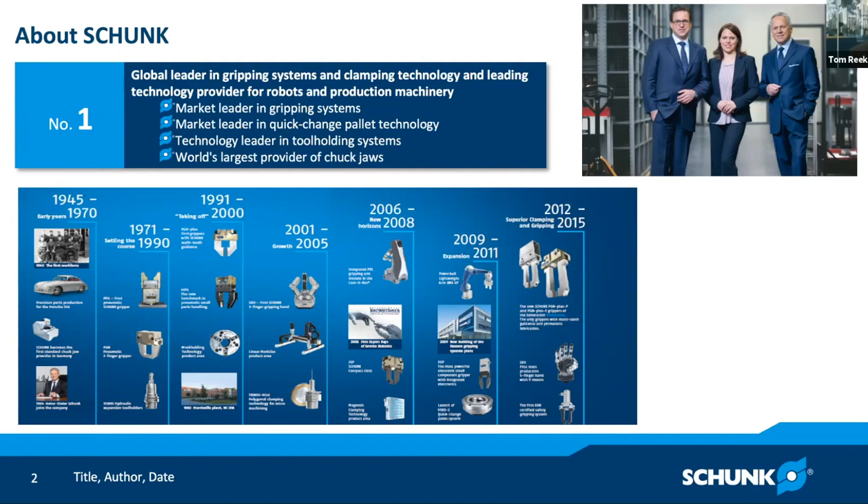So the table here is just showing a little bit about the evolution, but in the next slide, I wanted to speak to you a little bit about gripper evolution and how it relates to our topic today. And because we specialize so much in grippers, I tried to use it as the backdrop of a lot of the conversation, but the principles in terms of electric technology apply across lots of different actuators and equipment used in manufacturing, particularly automated manufacturing.

So when I started my career at Cummins Engine Company in 1994, that looks like something that we would have done. Or you remember when you had to actually construct the robot using a syringe to activate it. I don't know if you had to do that at all, but it looks exactly like that.

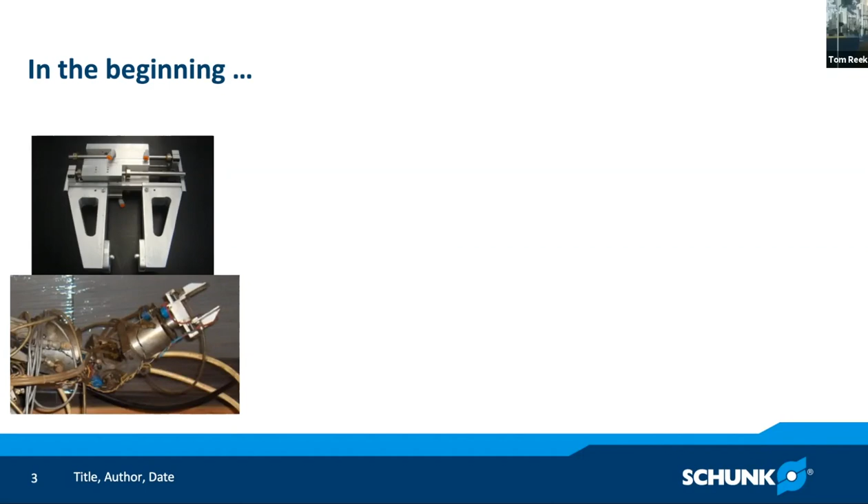Exactly. So here it's just showing in the beginning in the 80s, I always admire those first engineers that first adopted robot applications, and the fact that they were so successful despite the many challenges they had. Just in making any end of arm tool from the gripper, much less complicated end of arm toolings, they had to design the whole thing from scratch. They had to select and maybe design air cylinders, bearings, gears, and all these parts, put them together, hope it would work, and then run the application and go on to their next project.

And so what happened is, starting in the early 80s, a lot of companies started coming along like Schunk, making standardized actuators. What you're showing here is a cutaway of a modern pneumatic gripper today. It's this concise, very optimized component that applies gripping force and stability to hold the workpiece. It's easy to mount, easy to put sensors on, and does a good job of handling a wide range of parts just out of the box with only designing some small custom tooling to accessorize it.

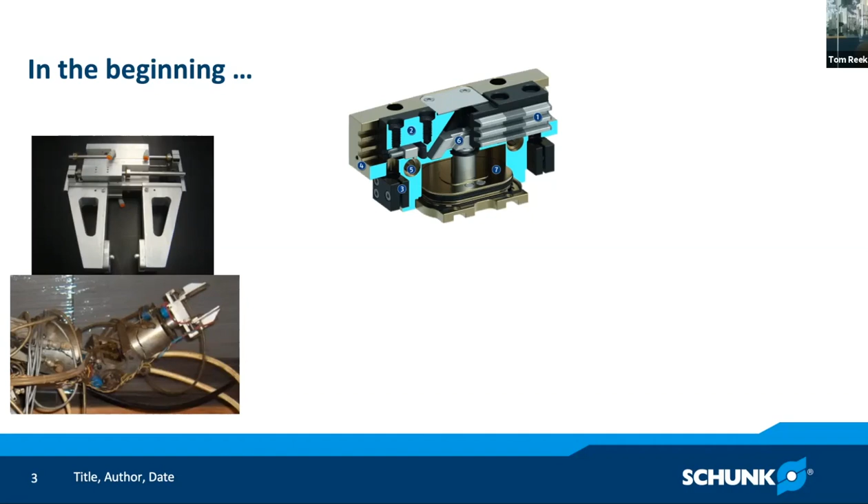So the standard grippers are mounted out of the box, custom fingers would be designed, and in the picture toward the right, you can see that even with what looks like really small grippers, they can handle really good payloads because these grippers were designed and tested, and all the unknowns are taken away, and the customer can have assurances that it's going to work for their application.

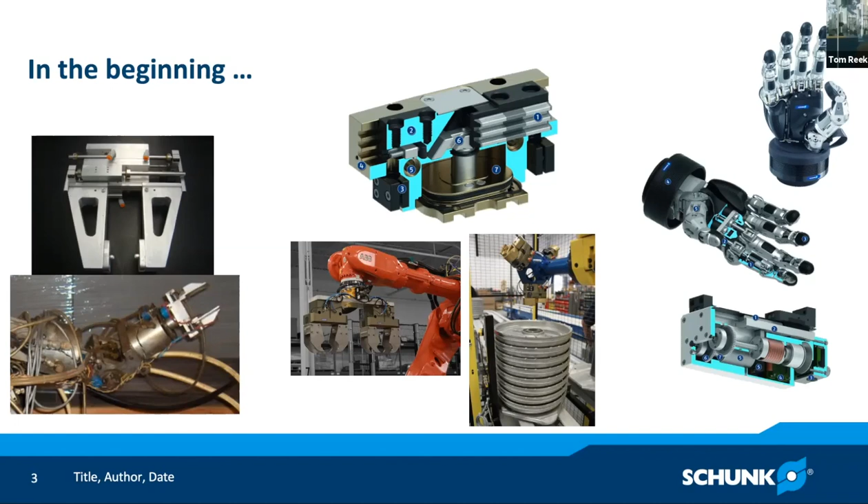So the later trend, or the trend that's continuing with this, is that in addition to the strong mechanics that are already available in the modern pneumatic gripper, we're also seeing these advanced mechanics that are taking place, like this hand, for example, that gives us all this flexibility. So now we're able to open up to a wider range of applications. We have the technology to be able to control these complex mechanics as well.

And then, in addition, the picture that's on the bottom of the screen there, that's just showing a simple one-axis gripper. But in both of these cases, what's happening today is we're seeing this combination of mechanical innovation combining with sensor technology, vision technology, software, so that these components are becoming more and more advanced, and engineers are not having to reinvent the wheel every time.

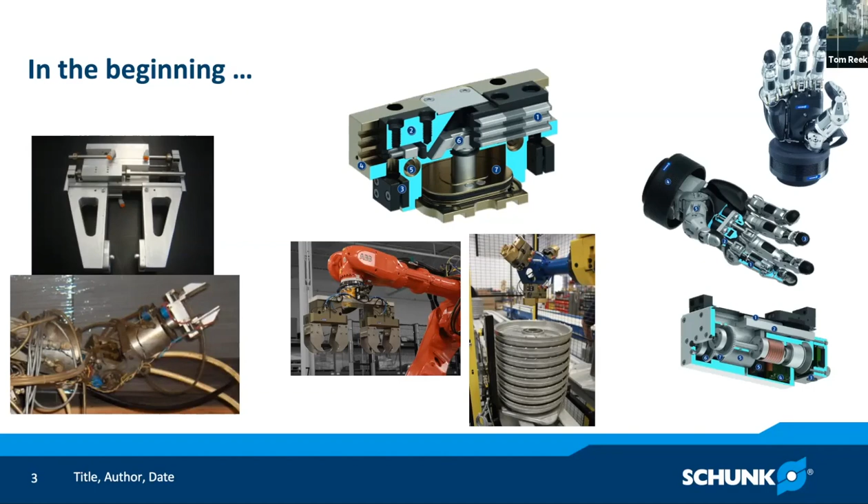They can get their application finished sooner because the components are becoming more and more application ready, not just from a mechanical standpoint, but also from a controls and design engineering standpoint. And that's a big part of where electric driven technology also is fitting in. Many of the engineers that you work with are involved in assembly automation type tasks.

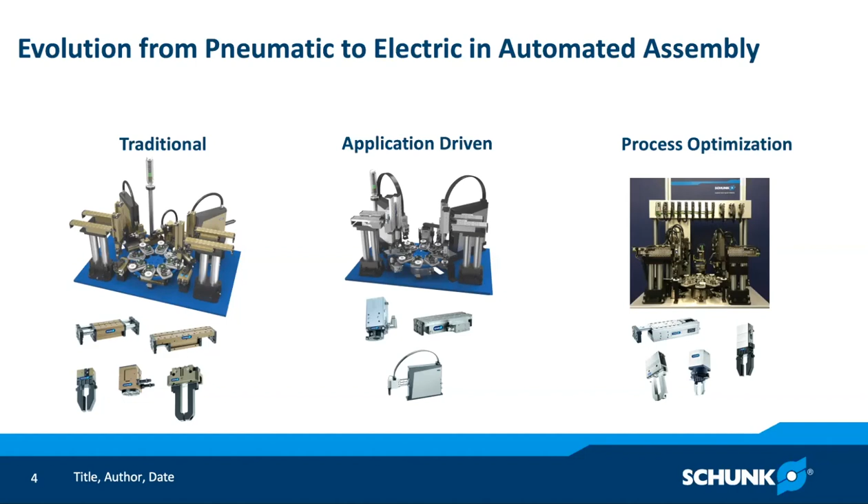Some of the components can just do the things that pneumatic components would also do as easily, but by sheer virtue that they are electric, the user of the machine can benefit in other ways. So what are those? What are some of the applications that would be unique to electric versus pneumatic?

So if we go back to gripping, for example, one thing that's really common is that you have workpieces of varying sizes, or say you're doing an assembly, you put a gear onto a shaft, and the assembly together is a different geometry than the part by itself. So you might have interferences that require position control, or things that change within the process that might require force control.

So for example, say you're picking up a glass vial and putting it into a tray, and then you have to pick up the whole tray. When you pick up the glass vial, maybe you need very low force because you don't want to crush it or mar it in any way. But when you pick up the box that contains it and other parts, you need a higher gripping force.

So that dynamic control is one of the reasons that drives people from pneumatic to electric, being able to change it on the fly with a certain amount of precision that you can't do with pneumatics. Got it. Yeah, that makes a lot of sense.

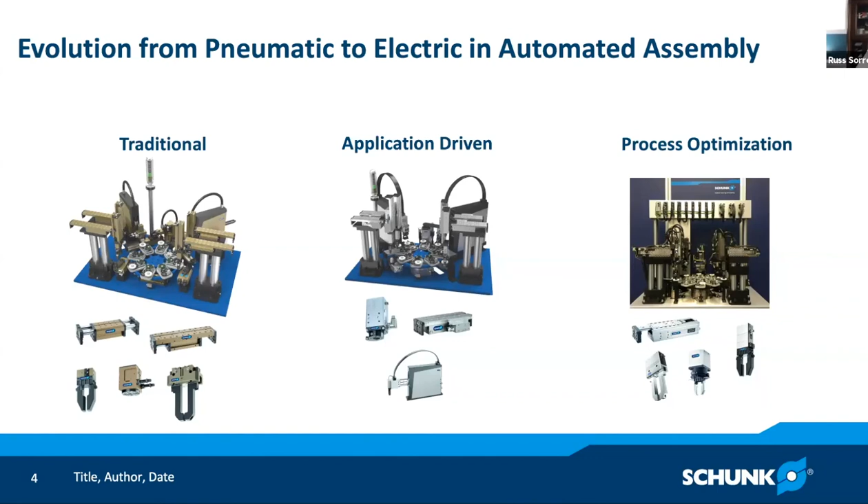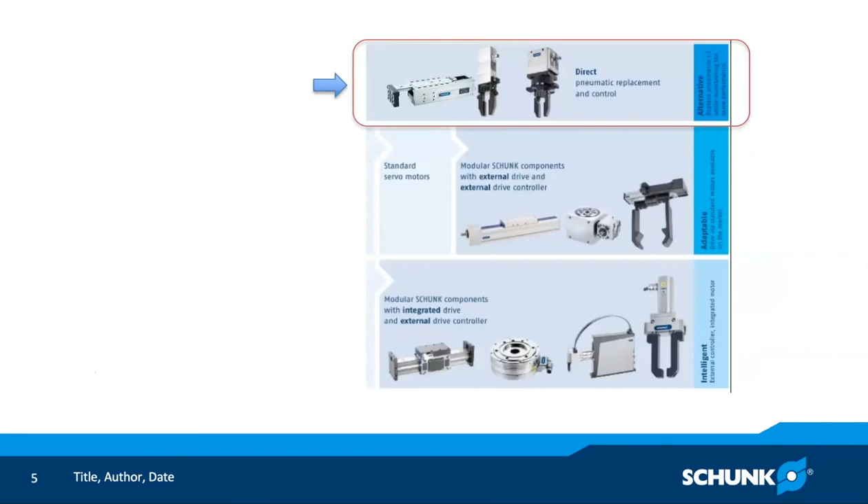Exactly. And you know that as well as anybody because you live in Charlotte, where the relative humidity is 98% all summer, right? Yeah.

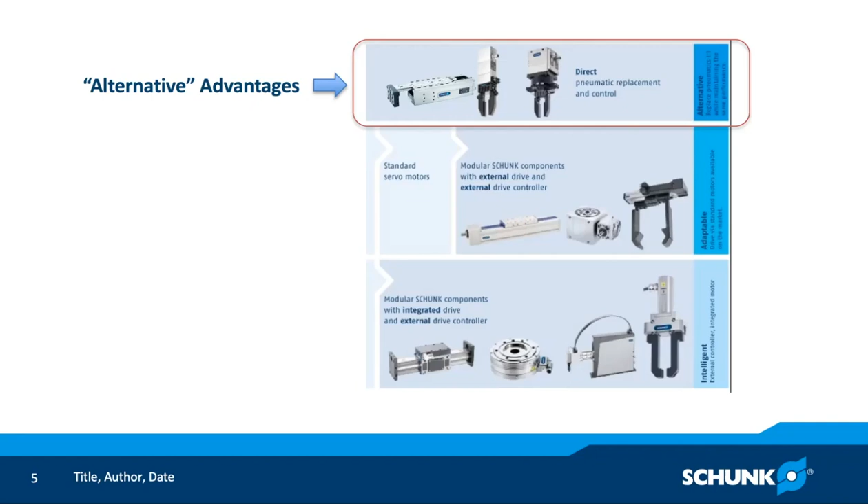So this is just expanding on some of those other advantages outside the technical things that drive manufacturers or engineers to go to electric. If you could just click again. We talked about a lot of these things just now, but I'll sum them up again. One possible performance advantage is that it can be easy for customers that don't support pneumatics.

We're seeing more and more that some types of machinery, particularly training cells and training robots, pharmaceutical machines going into drugstores to do pill sorting and packaging, are going into non-traditional manufacturing environments where you don't have the air compressors, the equipment that's prepping the air and keeping it clean and filtered. Air can be very loud. So for certain customers that don't want to support pneumatics, it could be a big advantage, even if the pneumatic actuators would also work.

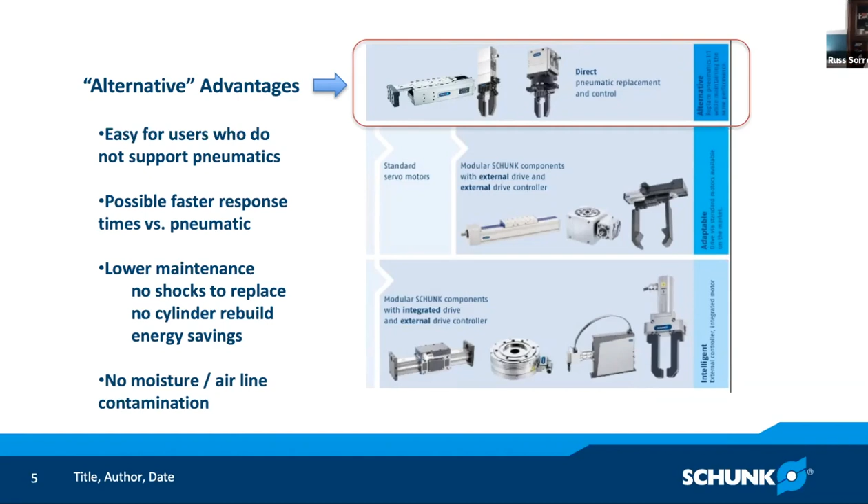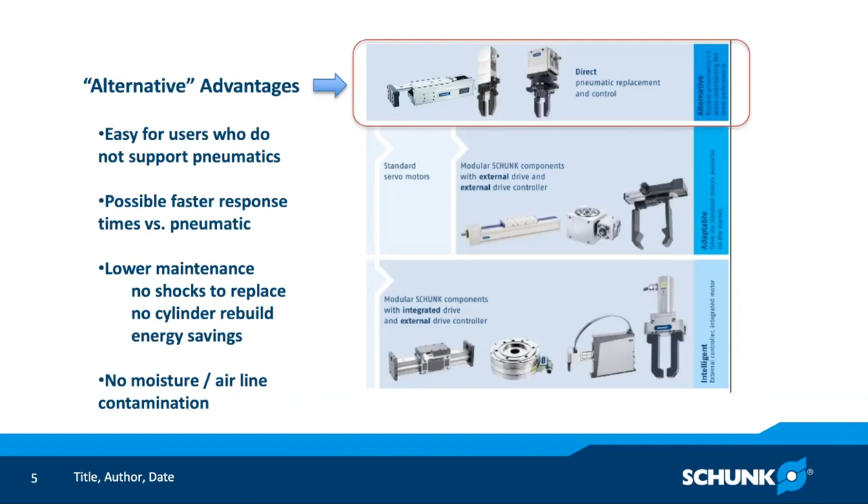It seems like in the medical world, it would be very beneficial as well, right? You're not bringing outside contaminants into a clean room. Yep, that's an extremely good point. They tend to be much cleaner, and from Schunk's side, we certify our products to be used in clean room assembly environments, and we find that the electrical products much more easily achieve those certifications versus pneumatic devices that require extra engineering to make sure they're sealed to certain standards. Yeah, you don't have to use some special grease, huh?

Yep. Now the intelligent advantages. The intelligent is more what we talked about in the beginning. These are things that give you more control of your application. They allow for speed control, acceleration control, control of forces and torques, position, and all the sensing.

So when you have multiple positions, if you're picking and placing to an array of different parts, even in our own shop we have in-feed cells going into a robot line that are actually very basic. They're pieces of wood with cutouts that handle raw materials and space them out. And depending on the workpiece being run that day, the in-feed might look quite different.

So you have to have that end effector be able to adapt, to handle the different parts of different sizes and the different spacing between the parts. So whether you're using a robot or linear actuators, or whatever type of grippers, having that control is often needed, and electric helps afford you that control.

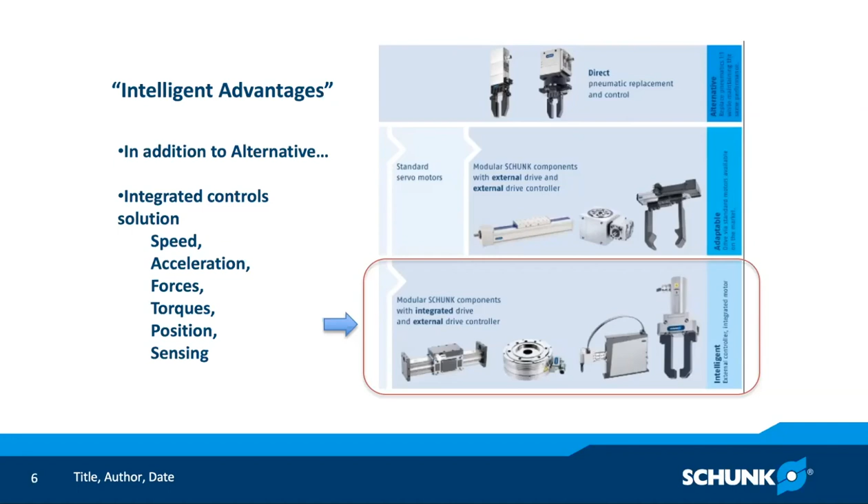made in the 80s. There were many years where pneumatic products were being designed and optimized for harsh environments and for food handling and for all these other types of jobs. So we have this not just with Schunk, but with dozens of other manufacturers. There are huge catalogs of pneumatic offerings out there that are standard. And because electric is newer, there just hasn't been enough time yet for them to develop out as fully to be able to handle more of the specialty type applications the way pneumatics already is. That makes a lot of sense.

So this is the adaptive intelligence slide I hadn't gotten to because I was asking you a bunch of questions. No, I appreciate it. You're good.

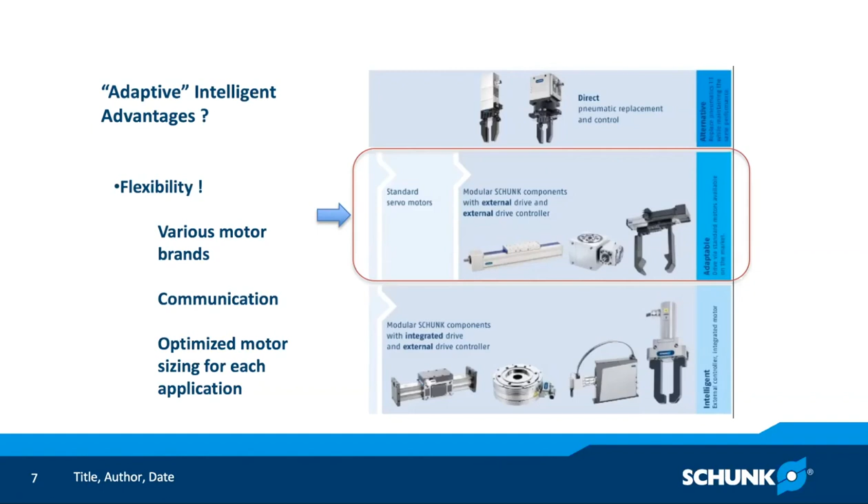You're a good interviewer. I just wanted to add with the intelligent, whether it's adaptive or integrated, you still get all the same benefits from a technology standpoint. But the main thing is with the adaptive, by having the motors be able to mount, you get more flexibility. So somebody operating a machine could conform to different motor brands. Say you have a gripper, and one plant may use it and the plant across the street may use the same gripper, but the two may standardize on completely different brands of motors that their in-house teams are comfortable using. So having that flexibility can be better.

I also already mentioned the communication can be more easily standardized. And the last thing is you can optimize the motors. When the motor is integrated, that's it. You have one motor that's designed for it. But it could be that, if the mechanics can take it, a different motor might want to be optimized for different performance based on the criteria that's in front of it.

So when you say motor, what is a motor company name? Like a Bühler that makes motors, or Johnson Electric? I'm mainly thinking about industrial stepper and servo motors. So you're thinking about Fanuc, Allen Bradley, Yaskawa, companies like that. Oh, okay. Very good. It didn't even occur to me that a company would want a specific motor, but I guess if you have thousands of these in your facility, you're going to want to standardize on something.

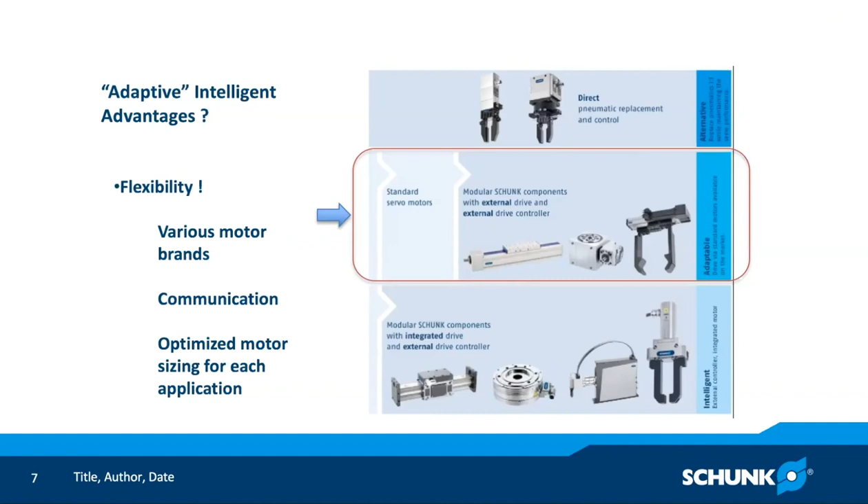And so they're all probably a pretty standard interface, I would assume, because that industry is standardized on a lot of stuff. Exactly. Now, when you order one, if you're going to use a Yaskawa, do you have to order a Yaskawa interface, or is the Yaskawa the same interface as an Allen Bradley? If we're lucky, sometimes they are. But it's usually pretty simple to design a motor mount and a coupling that would work. That's usually a very short order kind of adaptation. It's not very complex and very common.

Okay, very cool. Other benefits of electric. Yeah, so I thought it would be good just to kind of sort it out. You had asked me towards the beginning what are the benefits, and this is really what I was thinking.

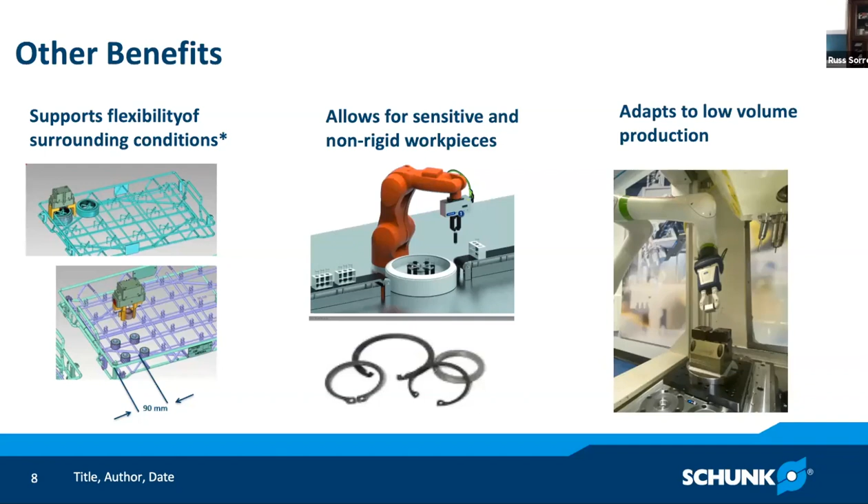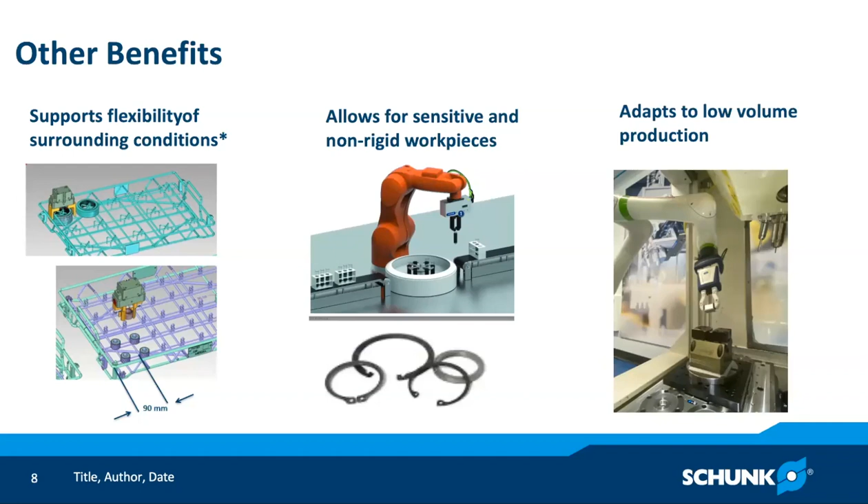And the last thing is one of the trends that we're seeing more and more: companies are looking to get into automation for the first time. And a lot of those times, companies are dealing with lower volumes. If you're making fuel injectors and you're pushing 50,000 fuel injectors a day out your door, you're probably already automating. But if you're a machine shop producing 50 of one type of part that has 2 or 3 variances that could change every shift, having electric products gives you a much better way to have that adaptability to do those changeovers more readily. Absolutely. That makes a ton of sense.